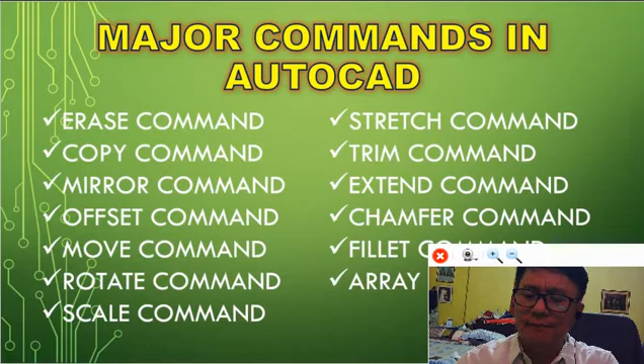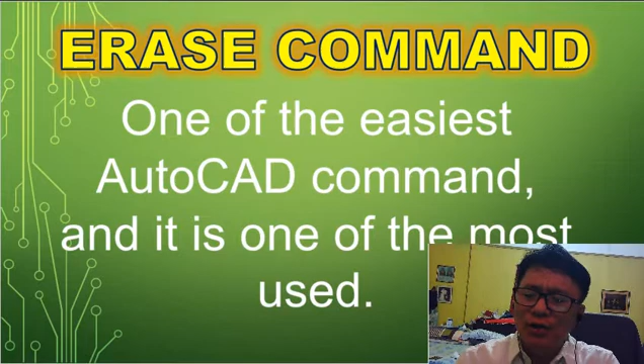Okay, let us proceed to the first major command. Erase command, one of the easiest AutoCAD commands, and one of the most used. Sometimes called the delete command, it removes unnecessary drawings in your drawing area. So without much ado, just sit back, relax, and listen carefully on how to apply the erase command with a video clip done in AutoCAD.

Guys, to use the erase command in AutoCAD, go to your command line and then type the command erase. Press enter and then select object or objects to be erased, and then click enter.

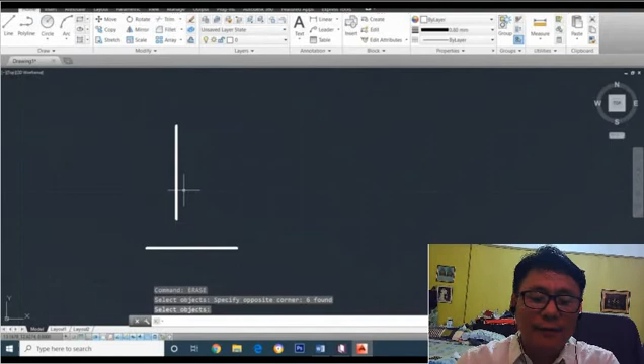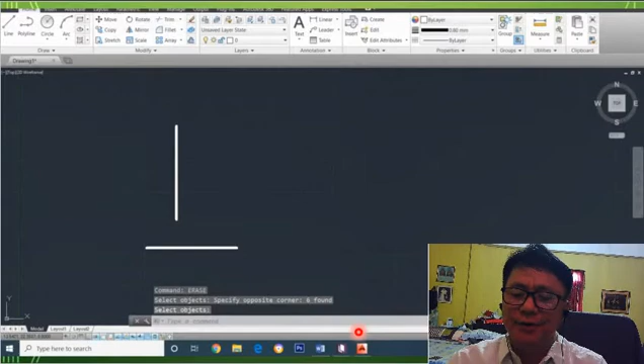That's it. Thank you. Class, how would you apply the erase command in CAD? Anybody? Daniel. Of course, you will have to first go to the command line and then type erase or E for shortcut, and then click enter. Select object to be erased in your working area and then click enter.

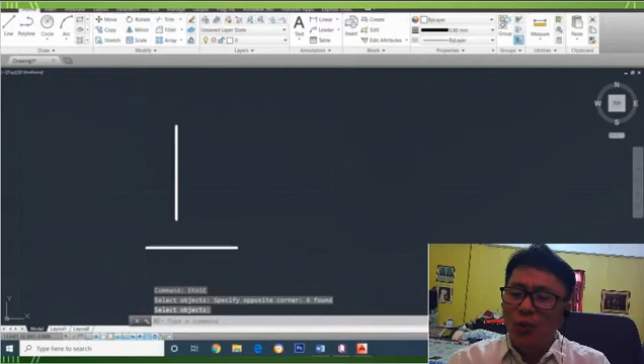Next, we have the copy command. Copy command may be used to create one or more duplicates of any previously generated drawing object or objects. And to duplicate object or objects in AutoCAD will be demonstrated in these video clips. Just listen carefully.

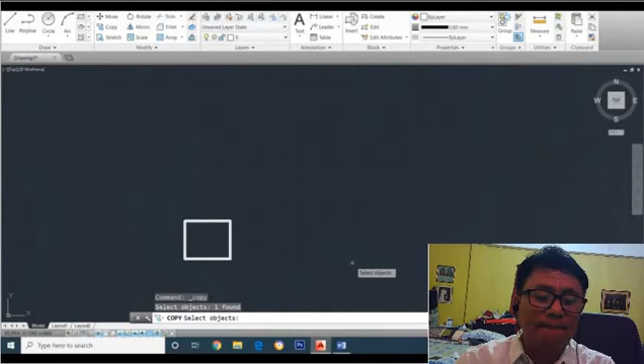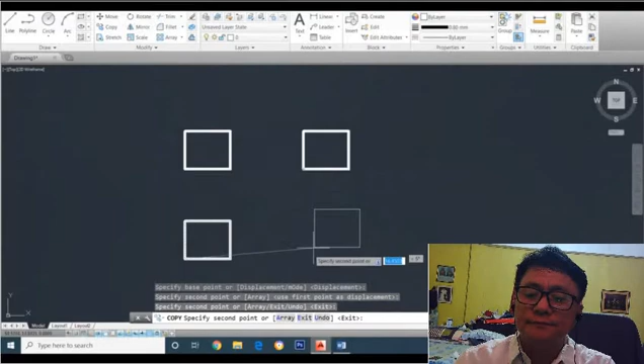Guys, to use copy command in AutoCAD, go to the modify ribbon, choose copy command, select an object, and then press enter. Select a base point, drag the object, then press enter. Drag the object and then press enter again. That's it. Thank you. Now class, how would you apply copy command in CAD?

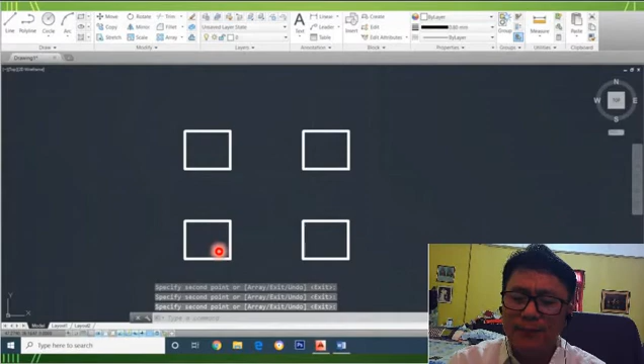Again, you can go to the command line or go to the modify tab in the upper part and then select the icon copy and click. Then select an object to be copied and presto, you can duplicate it anywhere you want in your drawing area.

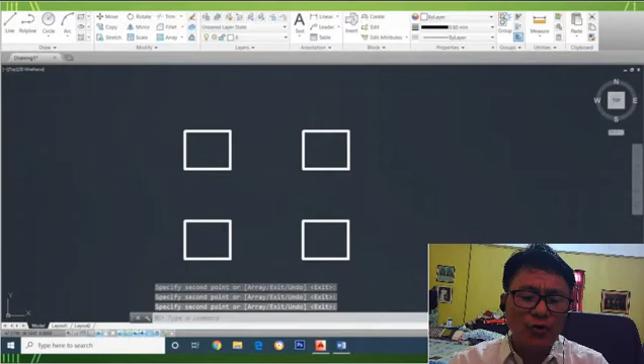Coming up, we have the mirror command. Mirror command allows the selected object in your drawing to be mirrored by selecting them and then using 2 points to establish the location of an imaginary line. To mirror drawing in AutoCAD, simply follow these procedures as you listen to this video clip.

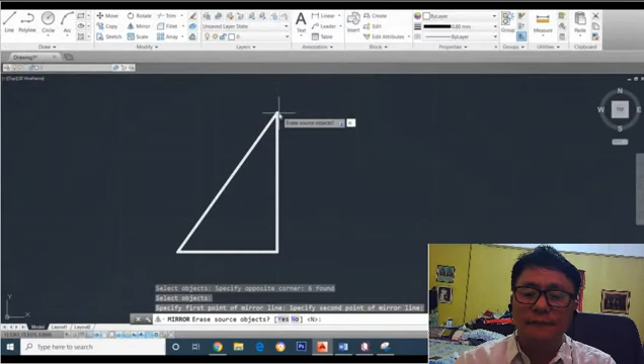Guys, to use mirror command in CAD, go to the modify ribbon, look for the mirror command. Select an object to be mirrored and then press enter. Locate the baseline point for the rotation and then click enter. And then to erase the source object, type no or n, then press enter. That's it. Thank you. How would you do mirror command in CAD? Anybody? Cora.

Okay, this is how to create mirror images in AutoCAD. First, go to the command line, type mirror or MI, and then press enter. Select object to be mirrored or pick one, and then select object to end the selection, and then specify the first point of the mirror line, and then specify the second point of the mirror line.

And then a pop-up question will ask you, erase source objects? It will be answered by yes or no. But for now, we will have to answer no. And the original object will be kept, and the command will automatically execute it.

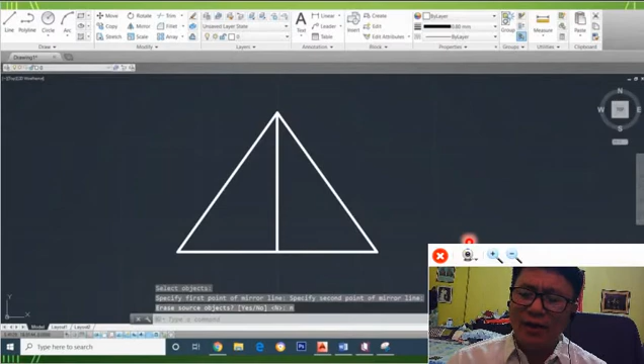Okay, class. Next in line, we have the offset command. Offset command produces a new object that is parallel or concentric to the object chosen. The new object is drawn at a user-defined distance, offset from the original object.

In offset command, the user defines the distance of the object. Therefore, you must be particular with the conversion of measurement because you need accuracy in applying this command.

Let's say, for example, how many inches in 1 foot? Daniel? 12? Correct. How about Cora? How many feet are there in 1 yard? Did I hear 3? 3 is correct. I know you learned this in your mathematics, right? How about centimeters in a meter? Gina, how many centimeters are there in 1 meter? Did you say 100? You are right.

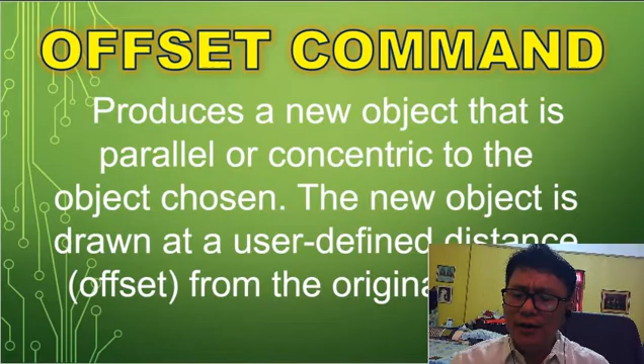Very good. You will learn more about the offset command by watching this video.

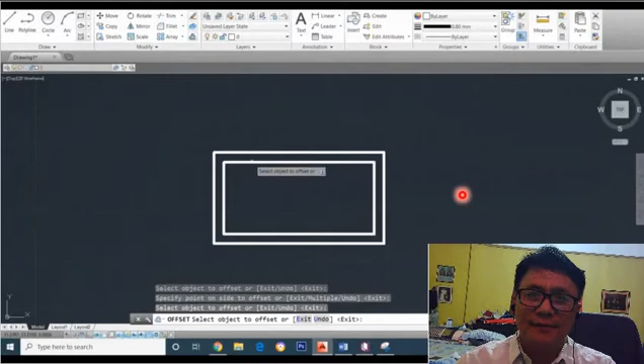Guys, to use offset command in AutoCAD, go to the modify ribbon, select offset command, specify the distance of 0.5 for example, and then press enter. Select an object to be offset and then press enter. That's it. Thank you. Class, how do you perform offset command in CAD?

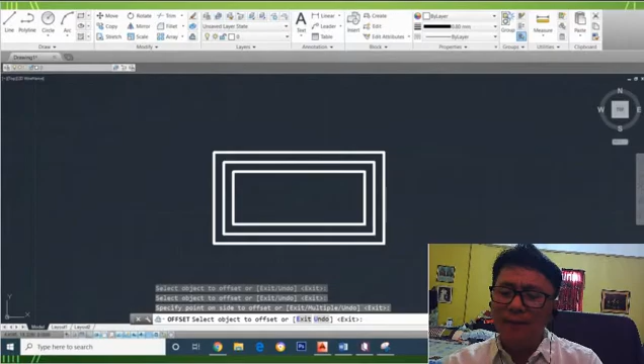First, go to the command line, type or click offset, or go to the modify tab in the upper part and then look for the thumbnail offset. Click the image. You specify offset distance and then select object to be offset. You specify point on side to offset and then click enter. Did you get it? Now, we will have the move command.

The move command operates in the same way as the copy command, except that no copy is made, simply moving the selected object from one position to another. Remember, the move command is to put the object from one location to another, and not to copy it, okay? And to understand it well, listen carefully to this demonstration.

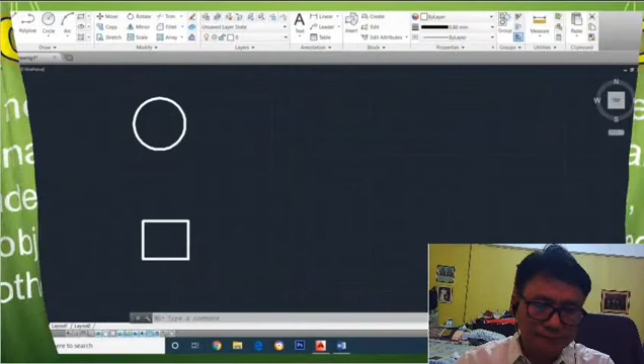Guys, to use Move command in AutoCAD, go to the Modify ribbon, choose Move command, select an object, and then press Enter. Select a base point for the object, and then drag the object to the location and press Enter.

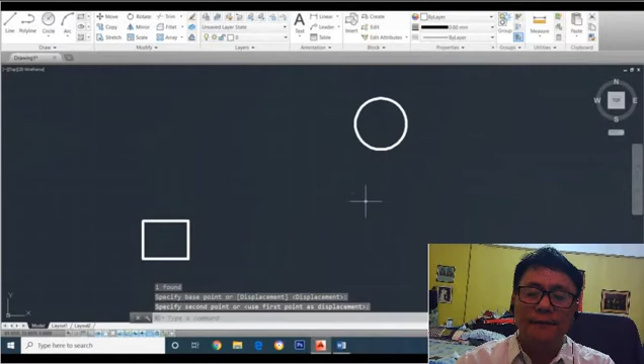Again, select the Move command, select an object, press Enter. Select a base point for the object, drag the object, and then press Enter. That's it. Thank you. Now class, how would you manage to use Move command?

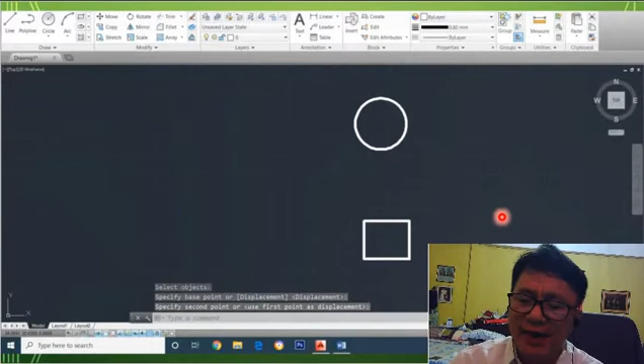Okay, go to the command line again, type Move or M, and then always click Enter. Select object or pick object to move, and then select object again to end the selection. Specify base point or displacement, pick it, and then specify second point of displacement, and then press Enter.

Subsequently, we have the Rotate command. Rotate command allows an object or objects to be rotated about a point selected by the user, meaning to revolve in a circle around an axis. Or, to elaborate further, please scrutinize the video clip.

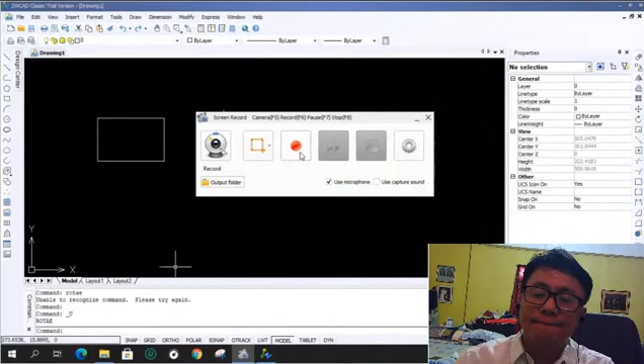To apply Rotate command in AutoCAD, first, select the object to be rotated. Go to the command line, type Rotate, and then press Enter. Select a point of rotation, and then rotate the object to the desired angle, then press Enter.

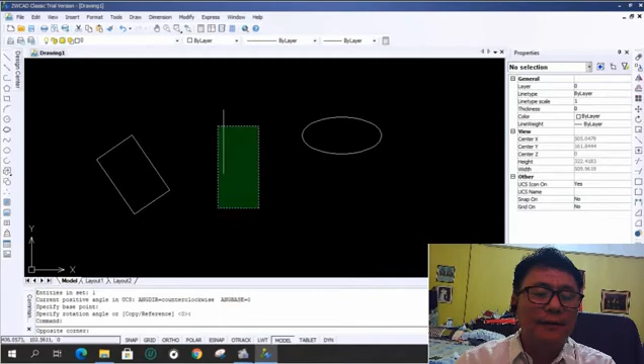Select the second figure, go to the command line, then type RO, then press Enter. Specify the degrees of rotation, 30 for example, and then press Enter. Locate the point of rotation, and then press Enter.

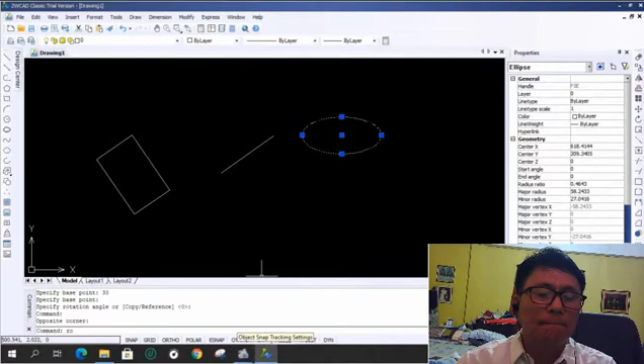Go to the third figure, the ellipse, and then go to the command line, and then type RO, a shortcut command for rotation, and then press Enter. Select a point of rotation, and then rotate the object, and then click Enter. That's all. Thank you. Class, how would you practice the Rotate command?

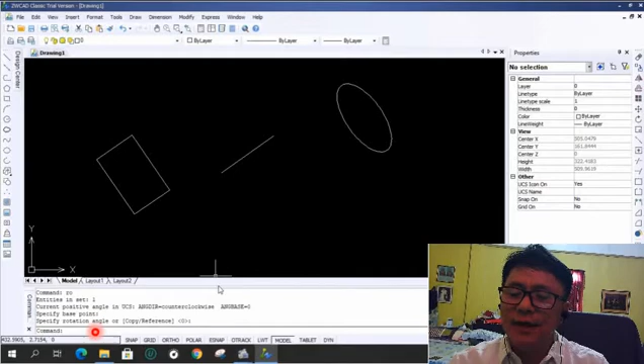First, go to the command line again, and then type Rotate or RO, and then don't forget to click Enter, and then select object to be rotated, and then specify the base point for the rotation, and then specify the rotation angle if you want, or rotate the object according to your desired angle, and then the last is to click Enter to execute the command. That's it.

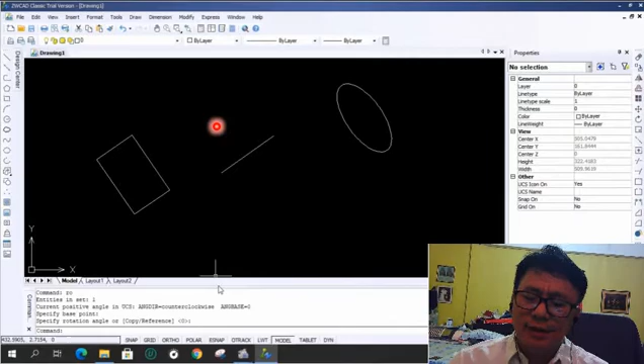Following after is the Scale command. The Scale command adjusts the size of an item or group of objects. In this command, we will have to make use of ratio and proportion. Actually, there are 3 classifications of Scale command, namely the Reduce command, the Normal scale, and the last is the Enlarge scale. Furthermore, check out the video clip.

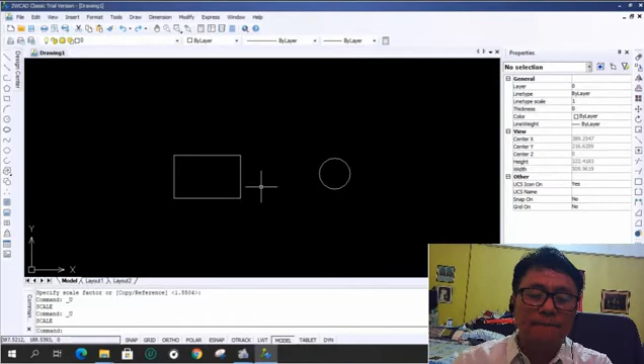Guys, to use Scale command in ZWCAD, select an object to be scaled. Go to the command line, type Scale, and then press Enter. Specify base point for the scaling, and then you can now reduce or enlarge the object like this.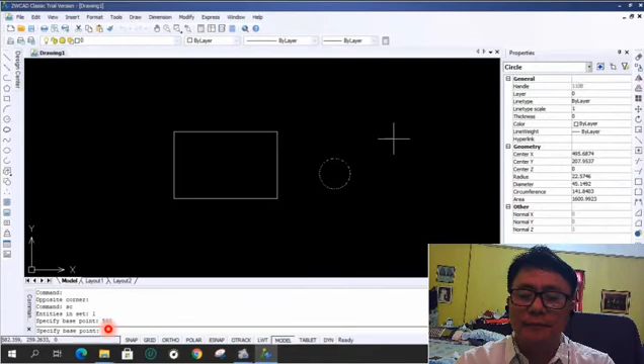And then select the second figure. Go to the command line, type SC, press Enter, the shortcut command for scaling, and then specify the dimension of the circle, type 100 for example, press Enter, and then specify the base point for the scaling, and then press Enter. That's all. Thank you.

Now class, how would you execute Scale command in CAD? First, go to the command line. Type Scale or SC, and then press Enter. Select object to be scaled. And then specify the base point. And then specify the scale factor. For example, enlarged scale, specify 200. And then click Enter.

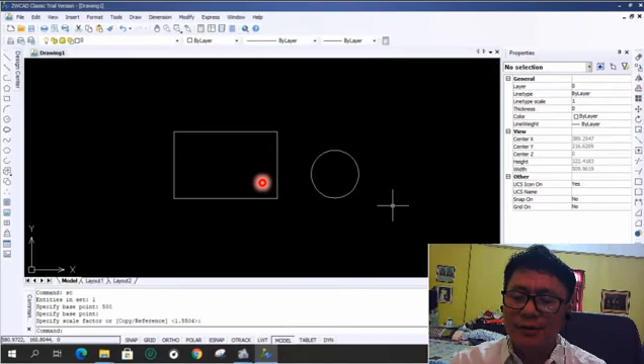Do you have any question? If none, let us continue.

Near at hand is the Stretch command. The Stretch command is to shift one or more object vertices while leaving the rest of the object unchanged, meaning to pull or lengthen a part of the object, but the other parts are unchanged. Now class, let us focus on the video clip for further understanding.

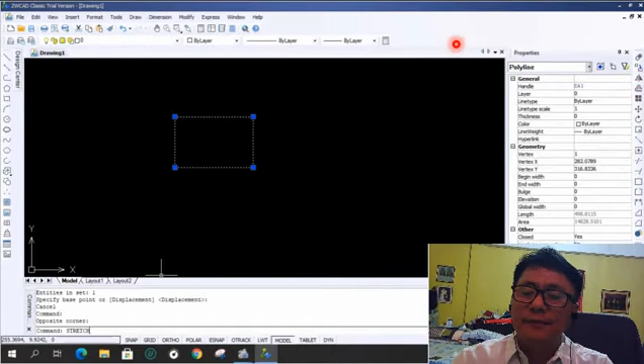Guys, to apply Stretch command in AutoCAD, select an object to be stretched. Go to the command line, type Stretch, and press Enter. Specify base point or displacement and do it this way. That's all. Thank you. How would you enact the Stretch command in AutoCAD?

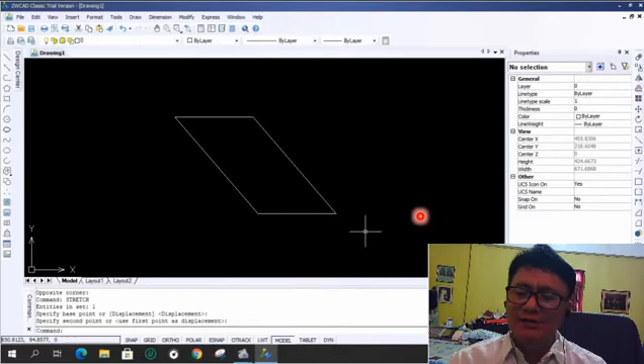Of course, first go to the command line, and then select object to stretch by crossing window or crossing polygon. And then next, select object to specify, and then specify opposite corner, and then select object to end the selection. Specify base point or displacement, and then specify the second point of displacement, and then click Enter.

Okay, did you get it? Coming after is the trim command.

Trim command is used to trim a portion of an object. Draw a second object that forms the cutting edge in order to trim and cut. It's the most used command in CAD, meaning to cut or remove by cutting away a part or portion of the object or objects. But what's important is that you must always set a cutting edge to cut away the object or objects.

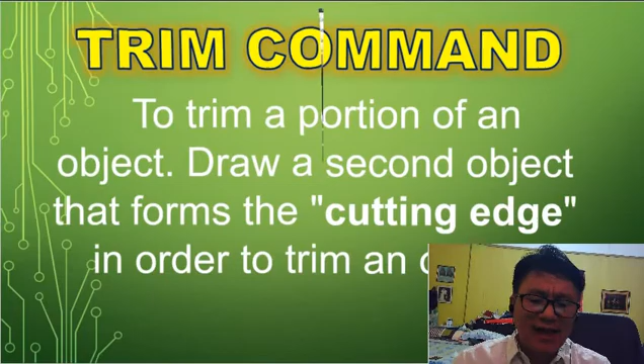Guys, to use trim command in AutoCAD, go to your command line, type command trim or TR, press enter, select a cutting edge, press enter, and then choose the object or objects to be trimmed. That's it. Thank you. Now class, how would you engage in trim command?

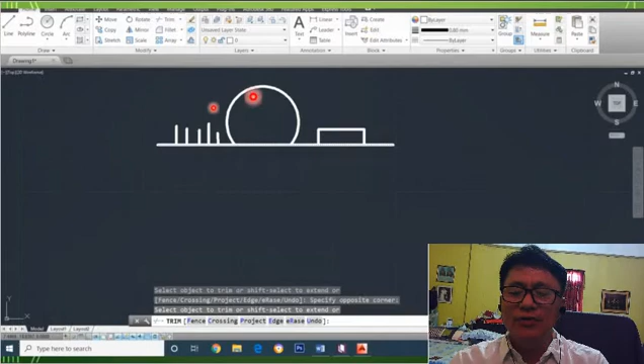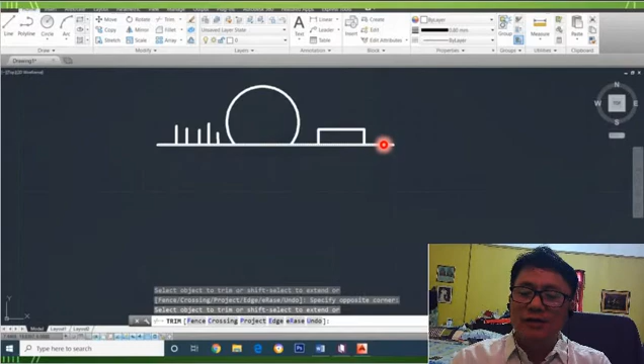Alright, coming up next is the extend command. Extend command lengthens a line to end precisely at a boundary edge, meaning to prolong or increase in size. But always keep in mind that you must assign a boundary edge or a limit to end a line. To study further, please look at the video clip.

Guys, to use the extend command in AutoCAD, go to your command line, type extend or EX, press enter, then select a boundary edge, press enter again, and then choose an object or objects to be extended. That's it. Thank you. Now class, how would you carry out the extend command?

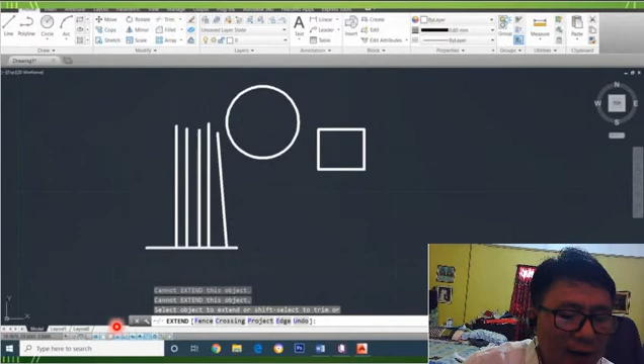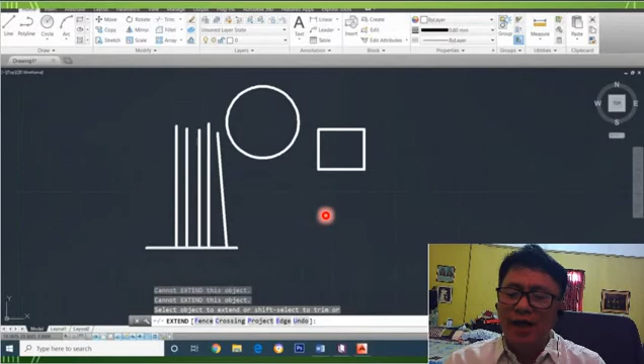Of course, go to the command line again, type extend or EX for shortcut, and click enter. First, select a boundary edge or the limit for the boundary, then press enter. Select an object or objects to be extended and then click enter. The command will be automatically engaged.

Okay, near at hand is the chamfer command. The chamfer command allows you to create a chamfer between any two non-parallel lines or any two neighboring line segments, meaning to slide, slant, or cut at an angle. To put it into detail, let's pay attention to this video clip.

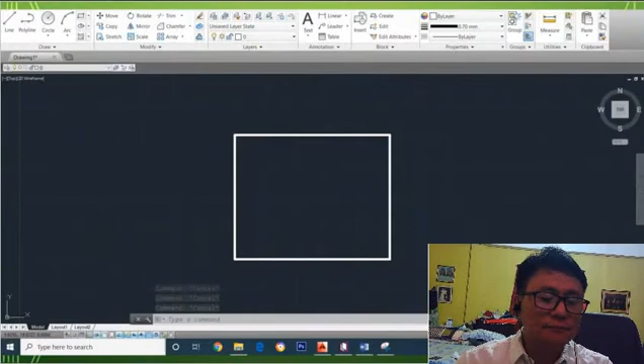Guys, to use the chamfer command in AutoCAD, go to the modify ribbon, select chamfer, enter the distance of the object to be angled: 5 for the first distance, 4 for the second distance, and then select the object to be angled, and that's it.

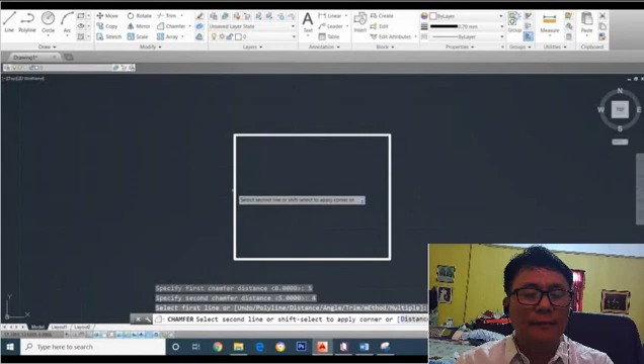Thank you. Now class, how would you bring into effect the chamfer command before the chamfer is generated? First, go to the command line, correct? And then type chamfer or CHA, and then press enter.

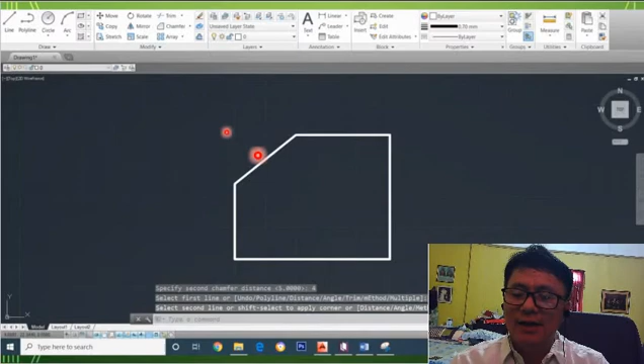Or the second procedure: go to the menu tab, look for the chamfer thumbnail and click, then select the first line and specify the first chamfer distance, select the second line and give the distance. Select first line and second line, and the chamfer is made. The command ends. Consequently, we have the fillet command.

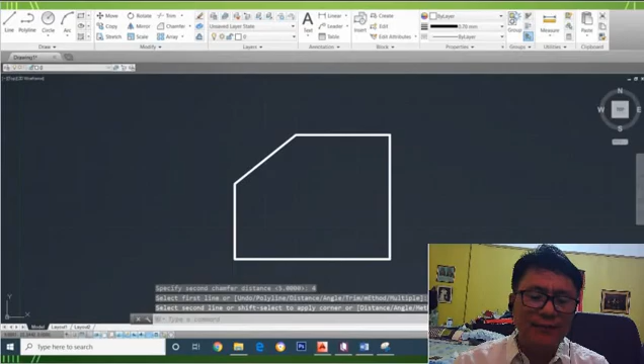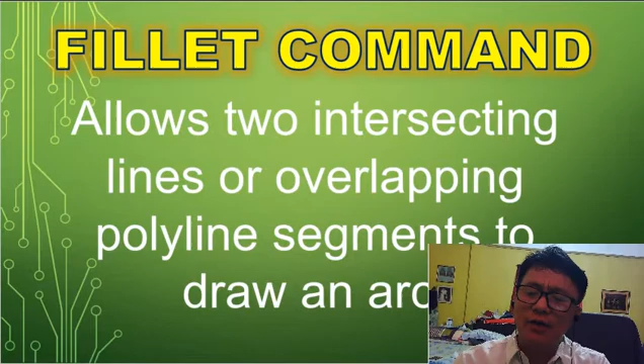The fillet command allows two intersecting lines or overlapping polyline segments to draw an arc, meaning to convert an angle into an arc or circular decoration. To examine further, take note of this.

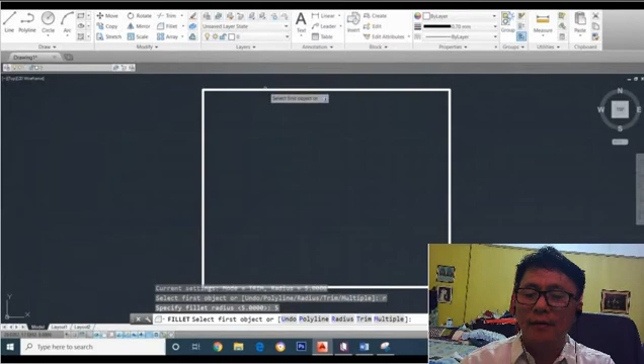Guys, to use the fillet command in AutoCAD, go to the modify ribbon, choose the fillet command, enter the radius, 5 for example, choose the corner to be rounded, and that's it. Thank you. Now class, how would you manage the fillet command in CAD?

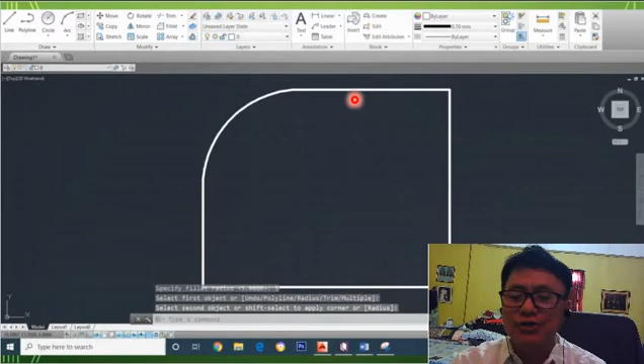First, go to the command line and type fillet or F, then click enter to execute. Select the first line of the object and then specify the fillet radius, 25, 30, or depending on you, and then click enter. Specify the first object and the second object, and the command will automatically execute. That's it.

Forthcoming is the array command. The array command replicates an existing object with a rectangular or circular polar pattern by using the array command, creating an ordered series or arrangement or formation of objects to eliminate or simplify further work. Let's watch this short clip.

Guys, to use the array command in AutoCAD, go to the array commands button, choose rectangular array from the dropdown selection, select an object, and then press enter. That's it.

How would you carry through the array command in CAD? Go to the command line and type array or AR, then press enter. Go to the ribbon, or in the home tab, modify panel, then put how many rows and how many columns, and click OK.

Class, do you have any queries or questions? Since you don't have any questions and you stay calm and composed, it means you really understand the lesson. Silence means yes, okay?

As your learning activity, I have with me these word searches. Daniel, Cora, Joe, and Gina, get your share of the word search. At the count of 3, get one and pass it to your back. Is that clear?

Okay, does everybody have a copy of the word search? You are given 5 minutes to do it. Class, begin.